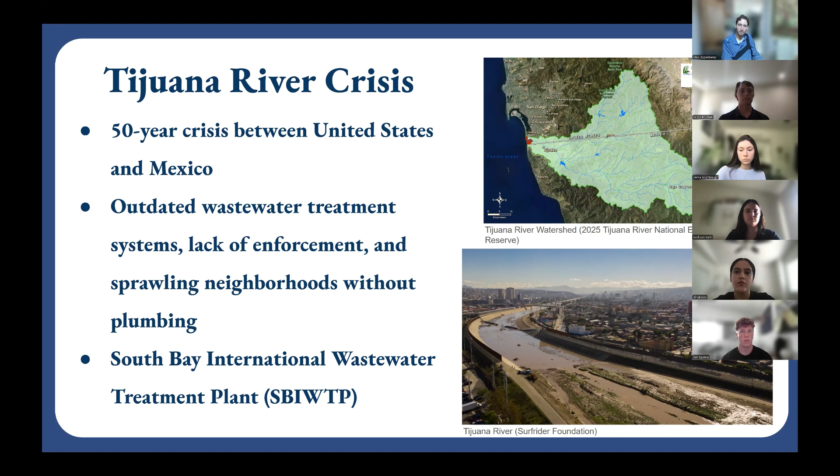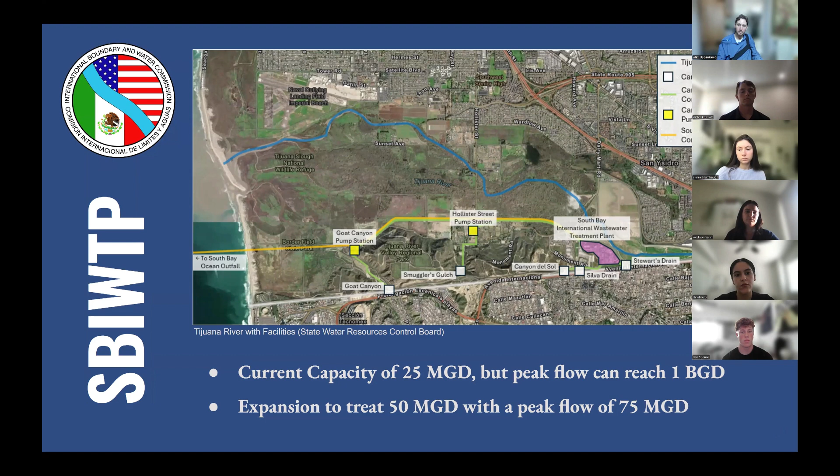Finally, the South Bay International Wastewater Treatment Plant is currently treating the influent that is coming across the border, but it cannot handle the flows. Currently, the capacity of the treatment plant is 25 million gallons per day, but during rainy events, that flow can reach a maximum of 1 billion gallons per day. Our expansion of the treatment plant hopes to treat 50 million gallons per day with a peak flow of approximately 75 million gallons per day.

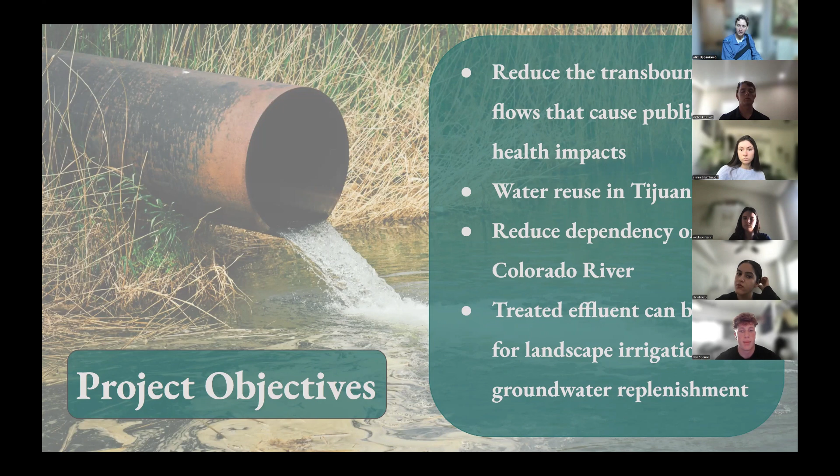Finally, the project objectives are aimed to reduce the transboundary flow that causes public health impacts and environmental impacts. Within Tijuana, we hope to ensure water reuse through the reduced dependency on the Colorado River, which is the main water source for Tijuana currently. The treated effluent can be used and will be used for landscape irrigation and groundwater replenishment between both countries.

Finally, through our next section, the nutrient removal process is the first step on our treatment train. Going over the importance of nutrient removal, first and foremost, the most important reason for nutrient removal is the prevention of eutrophication, and also the long-term stability of environmental buffers such as groundwater replenishment are in danger without nutrient removal. A sustained presence of nitrogen in our water systems has been proven extremely unsafe for humans, demonstrating that nitrogen requires continued monitoring. And we'll be choosing a Kruger's anaerobic anoxic A2O process, which will produce a figure like the one shown below.

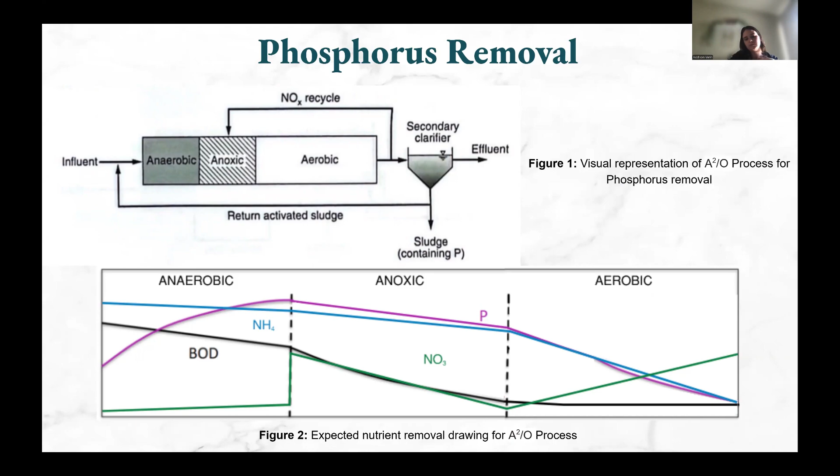Moving forward, we're going to talk about the design for the advanced water purification. So the first step is going to be membrane filtration, and in this step, a membrane material of polyvinylidene fluoride was selected for this design due to its ability to withstand aggressive cleaning and disinfecting, high range in pH, and both a high chemical and high fouling resistance. For the modules, an outside-in configuration was selected.

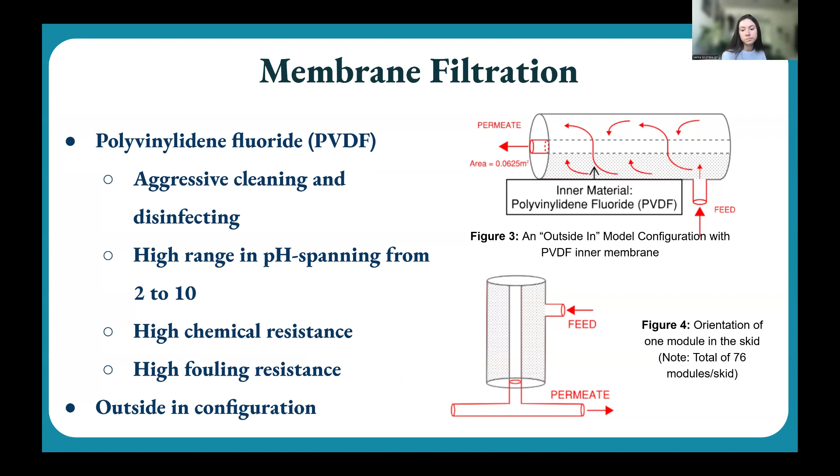And a feed flow rate of 24.67 million gallons per day is required to supply the 22.2 million gallons per day for reverse osmosis filtration. For this design, a total of 16 skids, each with 76 modules, is required, totaling in a needed land area of 818 square feet.

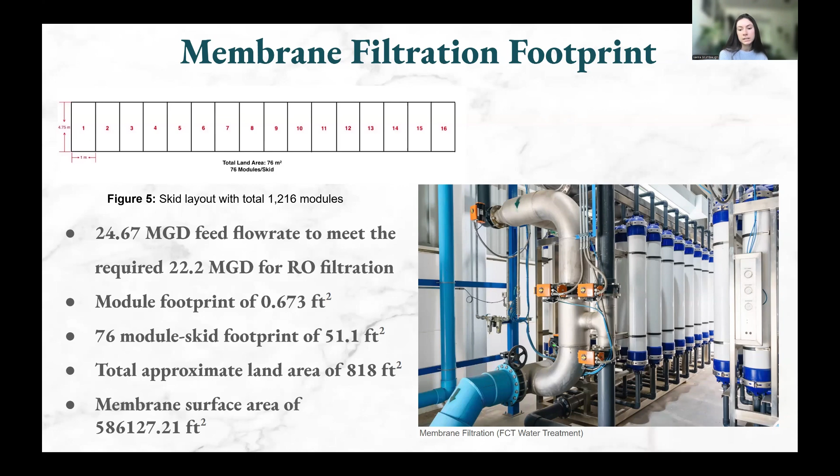Moving on from membrane filtration, we're going to go to reverse osmosis. And just some summary of reverse osmosis: it's the process of forcing water through a semi-permeable membrane using pressure to overcome the osmotic pressure. So we're going to start by taking the 22.2 million gallon per day feed flow rate from our membrane filtration step in order to get the 20 million gallons per day for irrigation.

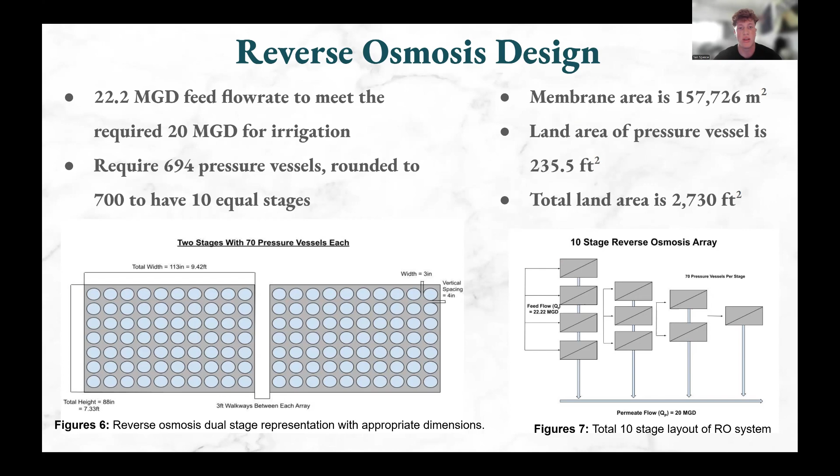So during our process, we were able to calculate a total of 694 pressure vessels are needed in order to handle that flow. And so we decided to round up to 700 so that we could have 10 equal stages. And each stage is one array. And we decided it's going to be a 10 by 7 array, making 70 pressure vessels per stage. And we were able to calculate that total area would be 157,726 meters squared, and the land area of one of those pressure vessels is 235.5 feet squared, taking up a total land area of 2,730 feet squared. Moving on.

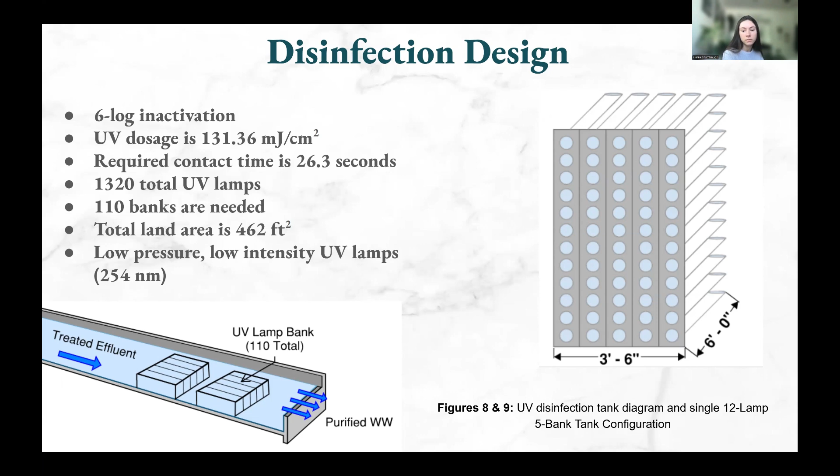For the UV disinfection, our design was based off of a log 6 removal of the MS2 bacteriophage. In this design, 1,320 low pressure, low intensity UV lamps at a wavelength of 254 nanometers are within 110 banks on an approximate land area totaling 462 square feet. The UV dosage required is going to be 131.36 millijoules per square centimeter, and an exposure time of 26.3 seconds was required.

Using advanced oxidation alongside UV disinfection is a more effective way to produce high-quality, safe water. While both methods can achieve 6-log pathogen removal, advanced oxidation also breaks down tough hazards like 1,4-dioxane, a likely carcinogen that UV alone can't remove effectively.

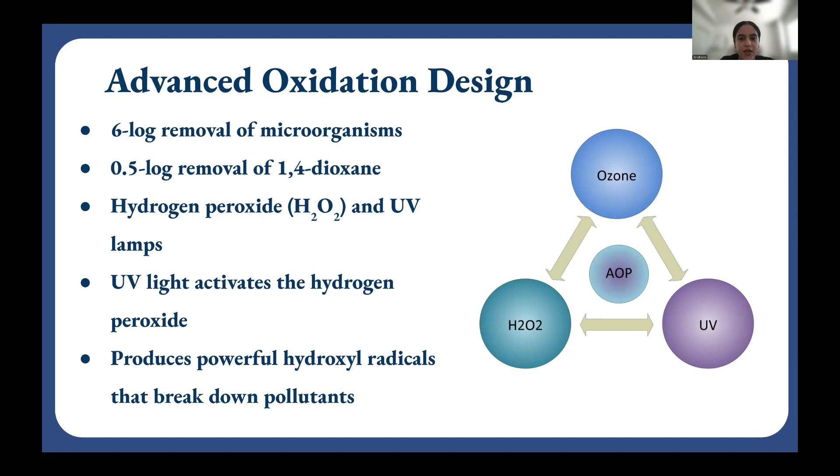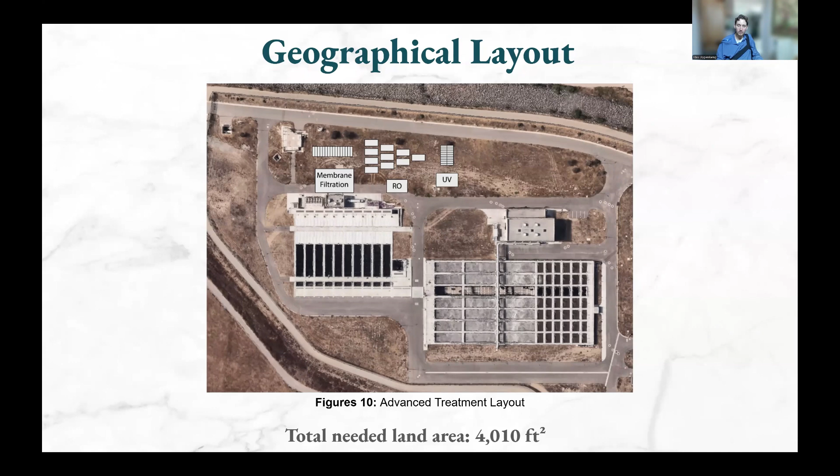AOPs typically combine hydrogen peroxide with low-pressure UV light to generate hydroxyl radicals, which destroy hard-to-remove pollutants. This method, used in systems like San Diego's Pure Water facility, ensures a higher level of water purity and safety. So the geographical layout of our three systems will be in the northwest corner of the current water treatment plant, and the total land area that will be needed is 4,010 square feet.

Alrighty. Thanks, Alex. We will now move the discussion to landscape irrigation, the logistical considerations of our project, as well as the strides our project looks to make in sustainability. Given the parameters of the landscape area, including vegetation with a moderate density and high microclimate factor, the landscape area was calculated with these considerations in mind.

Following the procedure outlined in Chapter 18 of the water reuse text, a total water volume of around 27.6 million meters cubed is used, in addition to a summed hydraulic loading rate. The result is a total landscape irrigation area of 8,700 hectares. The reused water will sustainably serve Tijuana golf courses, parks, and sports stadiums for years to come.

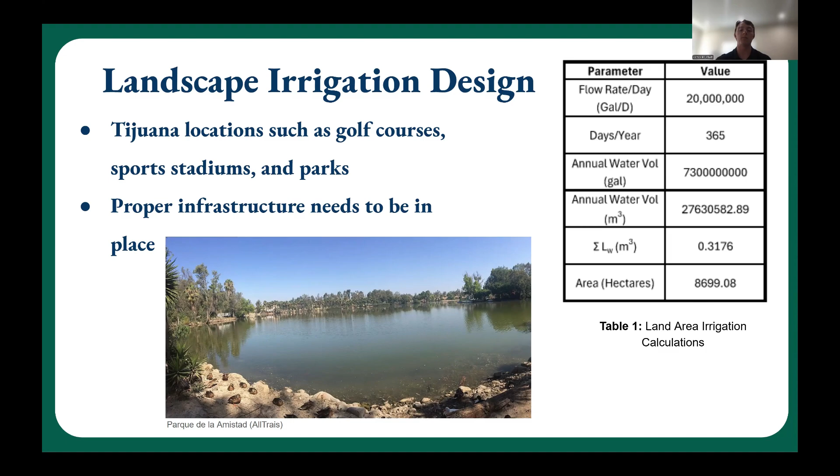Going over the logistical considerations, we'll be using the surface application method for groundwater replenishment, which applies the recharge water to a spreading area. And currently, potable water reuse is not the focus of this project and is not possible because the Tijuana River exceeds typical municipal wastewater in terms of contamination. The main goal is wastewater treatment and environmental protection. And with limited public support, the public's perception is also another obstacle to surpass before potable water reuse would be viable.

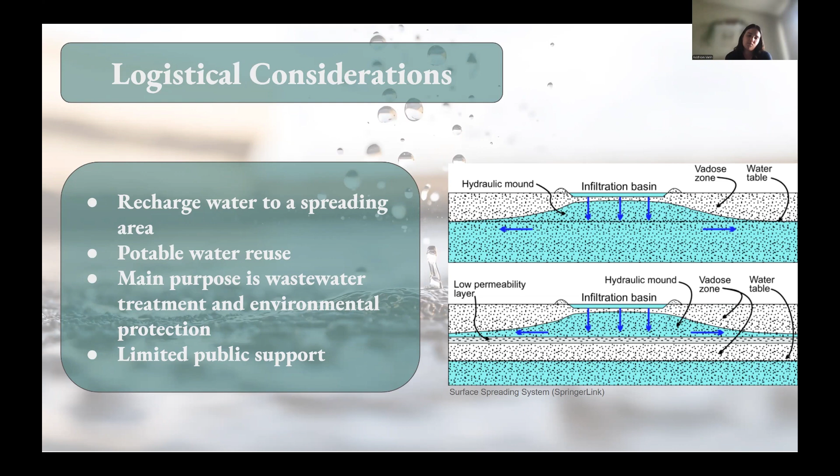Okay, moving on to sustainability. So we designed our project with the three components of sustainability in mind, those being the environment, the economic factors, and the social factors. So environmentally, by cleaning up and using this advanced process to get rid of all the pollutants down to the nanograms, we are able to produce and release cleaner water back into the river and out into the ocean. This allows the ecosystems to rebuild and be healthier for years to come.

And economically, our project is able to offer new jobs in building the plant, operating the plant, maintaining the plant, as well as the irrigation process of laying all the pipes and designing that whole process to make sure that runs effectively. And socially, this project is helping us build connections with Mexico, as well as helping the communities have a better livelihood down the river and by the ocean where the water was once being dumped.

And our project was also designed with 4 sustainable development goals: Goal 6, Goal 9, Goal 14, and Goal 15. Goal 6 is the clean water and sanitation goal, and our project was able to follow that by creating even cleaner water than before and producing that out into the river and ocean. And then goal 9, industry, innovation, and infrastructure.